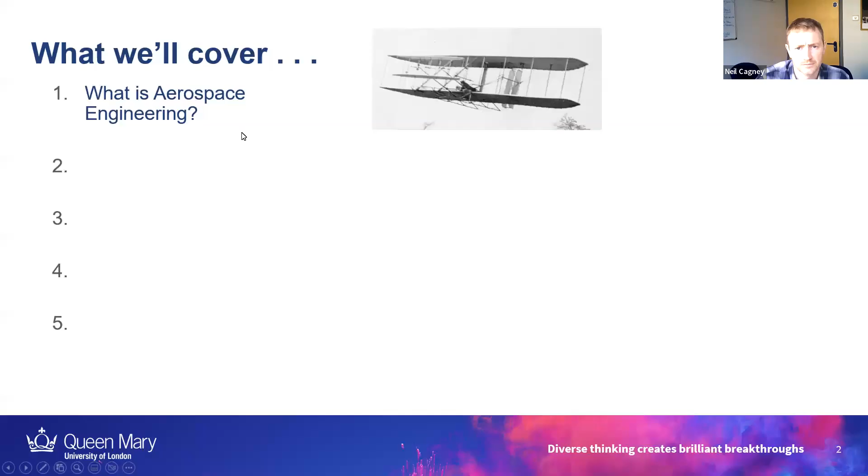So that's just what is summarized there. So what is aerospace engineering? We're going to talk a little bit about aerospace at Queen Mary, as well as what you'll study. I'll give a brief introduction to the student projects, and then also we'll talk about the careers and opportunities. So firstly, what is aerospace?

Aerospace. So there's also space systems. That could be rockets, the type of things that SpaceX is producing, or it could be satellite systems that often involve a lot of robotics and energy systems. So it could be those.

And then also, more broadly, when you think of something being aerodynamical, you think of how it relates to the air flowing past it, and that would be relevant often in the automotive industry. A lot of students are very interested in Formula One, but there's also a lot of stuff like family cars, and there's a huge range of jobs in the UK in both those sectors.

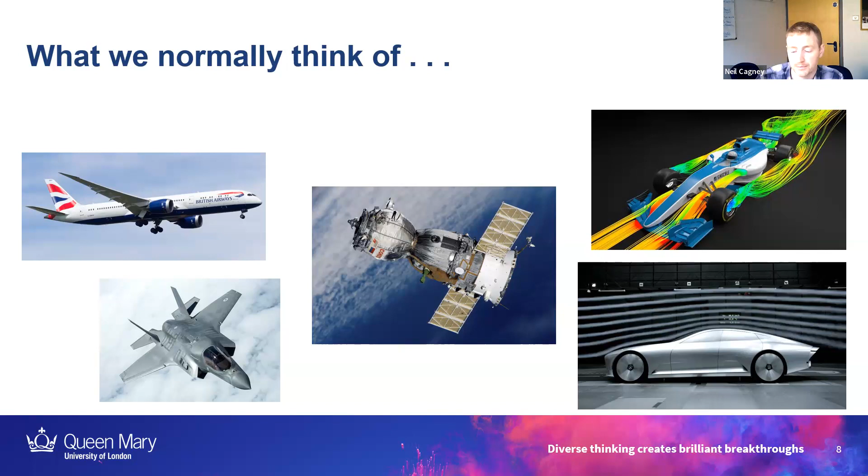The design principles are exactly the same. If you've got any type of power system, it generally involves either burning a fuel or turning water into steam, passing that steam through a turbine, and taking that rotational energy. So it's essentially like a wind turbine. Different design constraints, but the overriding principle is it's just aerospace, it's aviation, it's that flow past wings, past turbine blades that makes them rotate. So aerospace is central to energy systems.

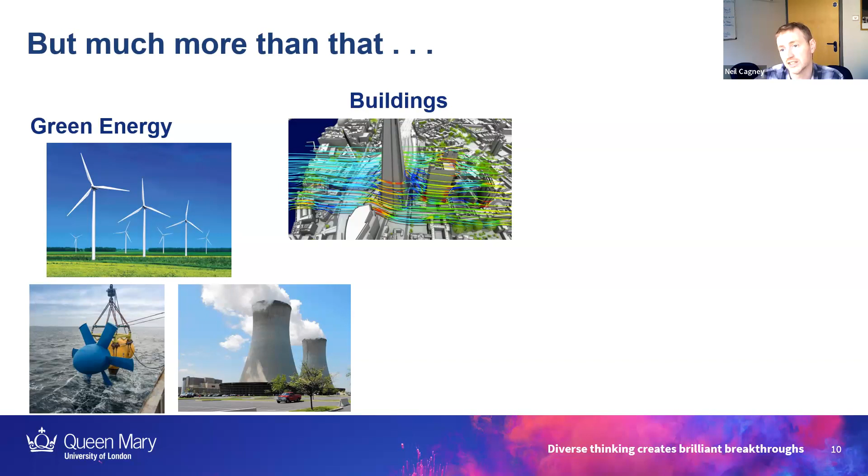One of the elements that's been quite relevant in recent years is disease spread. These slides were made during the pandemic, and one of the things a lot of us within the aerospace department were working on was COVID spread. The way it spreads is through tiny droplets or large droplets. Tiny droplets drift with the air, large droplets move ballistically, essentially like a missile, just fires out.

One example was from the 2010 World Cup in South Africa. They introduced a new football, and when they played the actual tournament, they found it swerved kind of chaotically. What had happened was they thought, by sealing it better, removing all the stitches and making it extra smooth, they'd get better play. In fact, what they found was it caused it to swerve, and they hadn't really understood the aerodynamics of it.

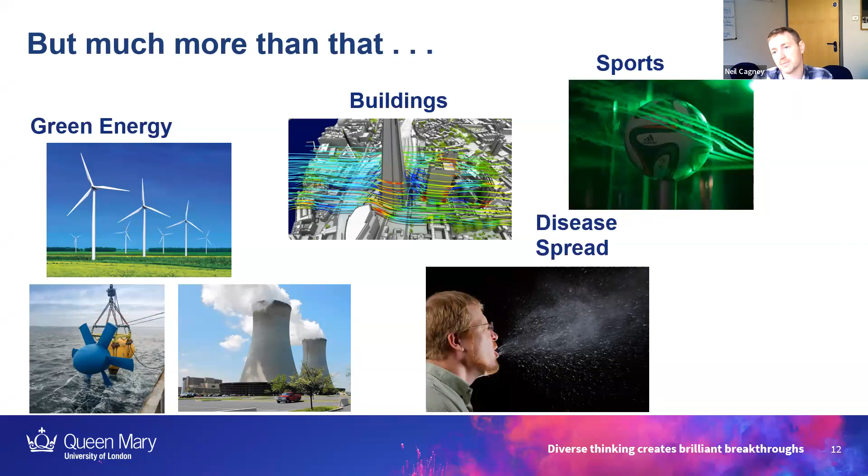So the point of these slides was just to give a scope of aerospace. You're not just locked into some of the classic things we think of with aerospace - not just aviation or space or automotive design. There's a huge range of different potential sectors you can move into with an aerospace degree.

Now, if you do go into the more classic sense of aerospace, what are some of the things you could be working on? There's essentially three different sectors. One is experiments - for example, you're working with Boeing, designing the latest generation of plane. It's constructing things, physically testing things in wind tunnels.

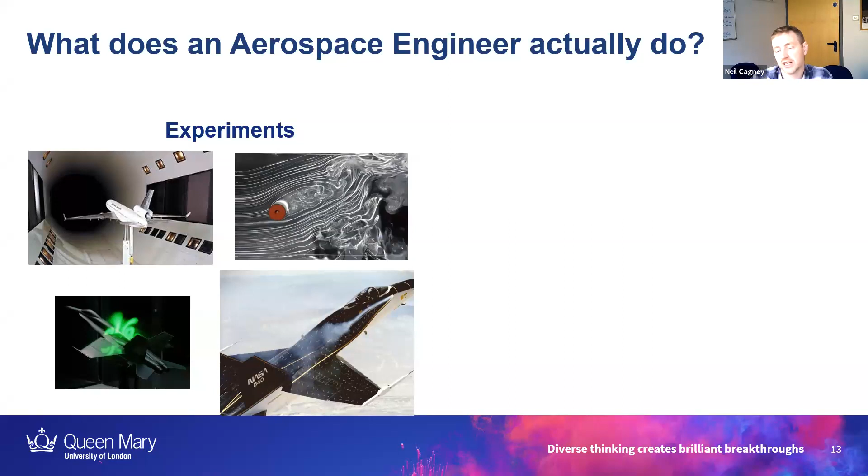There's different ways you can do that - it could be taking test flights, which is the image shown at the bottom right, or it could just be doing wind tunnel measurements. And it's reading this data and trying to process it and test out the designs.

One of the massively growing sectors is computer simulations. Now if you've got, say for example, a new wind turbine design, 100 meters high, 50-meter diameter, it's not practical that you would be making test models each time, installing it at a cost of millions, and then testing it, and then scrapping the design and starting again.

Just some other examples here - there's fighter jets, the Formula One car, but it's used in all sectors. How this would work in practice, something not shown here, is you generally work with design engineers. So essentially the whole process of how design takes place: design engineers will come up with something, a new design, that gets tested with the computer simulations.

And the computer simulations are great, but we can't really trust them until we've got experiments to go with them. So the experimentalists and the computer simulation people work together to test out the new designs. They might give guidance, link back with the design engineers, and the design engineers will generate the next generation of designs. That's the whole basic principle of what the majority of jobs are within aerospace.

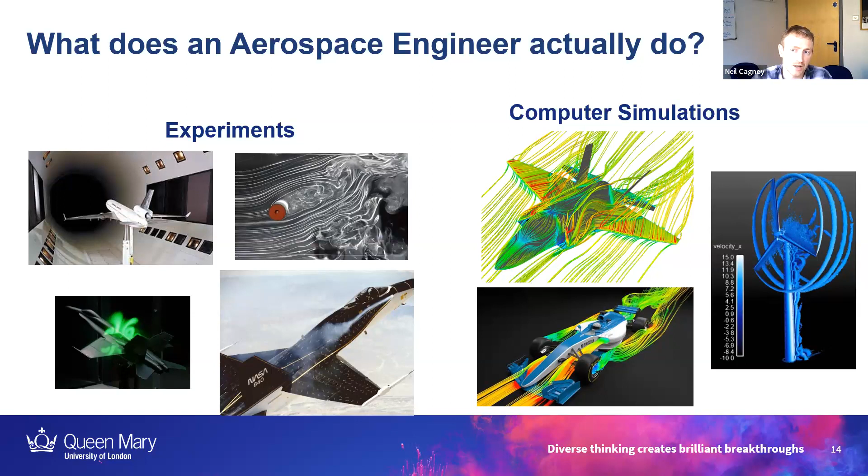Computer simulations is probably the largest sector, followed by design, and the experimentalists a relatively smaller amount.

Now I'll just talk a little bit about aerospace within Queen Mary - a little bit about the aerospace division here. The aerospace department was set up in 1907, 1908. That means it's the oldest aerospace department in the UK, and arguably the oldest in the world. For context, the Wright brothers' flight was just a few years before, I think in 1903. So we're really right at the cusp of when it started.

We're fully accredited by the Royal Aeronautical Society and the Institution of Mechanical Engineers. Now what that means is these are UK-wide bodies of mechanical or aerospace engineers, and they've come in, gone through our entire teaching program, and given it the stamp of approval that this is a high quality degree that will be respected anywhere in the world.

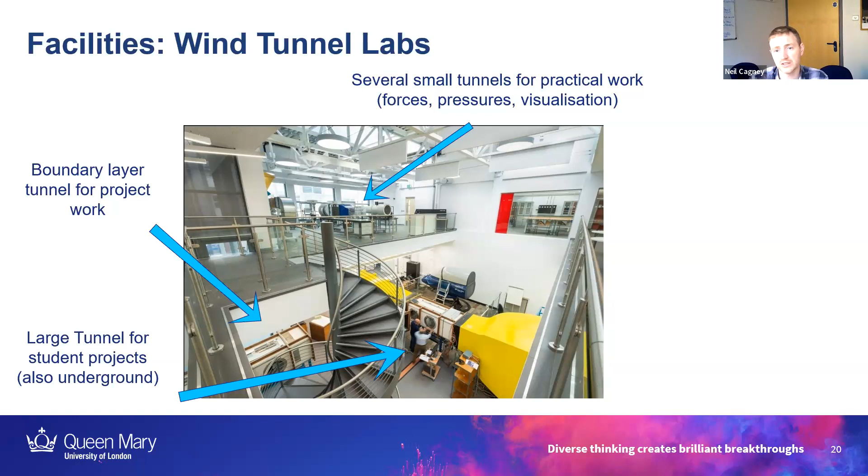There's several smaller wind tunnels on the top here. These are things for measuring the forces and stuff you can place in the wind tunnel, measuring pressures, doing smoke visualization. If you come to some of the open days, you might get a demonstration of these. They're used extensively throughout the second semester of first year, and then also in second and third year as well.

There is a flight simulator. This is soon going to be out of date - we've commissioned and bought a new one, which will be installed in the coming months. It's larger and has greater adaptability. I'll talk about that again in a couple of minutes.

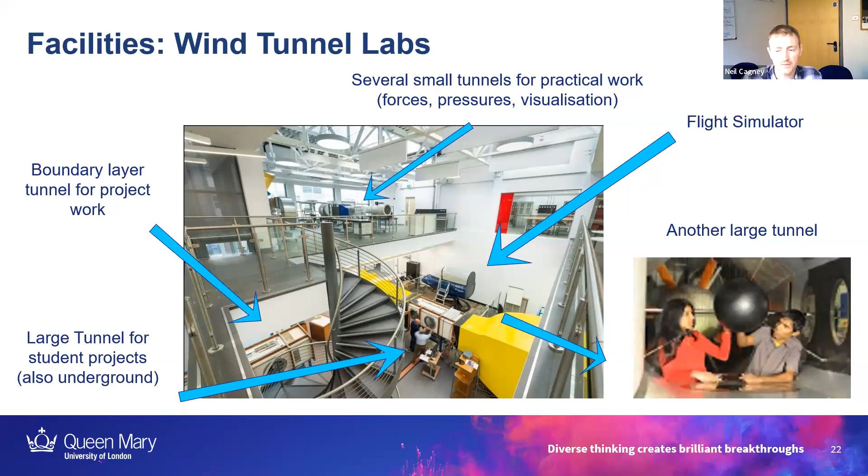And there's another even larger wind tunnel that can go up to about 100 miles an hour. That's out of shot there.

We also have the series of supersonic tunnels - supersonic meaning going faster than the speed of sound. We have 3 of the main tunnels, with 2 shown on top. One of them, shown top left, can go up to Mach 3, 3 times the speed of sound, so the air is going at about 1 kilometer a second.

We've also got a transonic one on the top right, looking at wind speeds just below supersonic, which is where a lot of civilian aircraft operate. We can measure the forces and pressure distributions within the wind tunnels. If you've got the nose of the plane, shown bottom left, you can look at the shock waves created by the supersonic flow and also the effect of that flow on the structure.

We're also interested in supersonic acoustics - we've got some facilities for that. If any of you have ever experienced a supersonic boom, you'll know it's very loud. For example, with the Concorde, the civilian jet that flew back and forth from the UK to the US, one of the reasons it went out of business was that it was no longer economical, partly because they couldn't fly at supersonic speeds over land since the noise was too high.

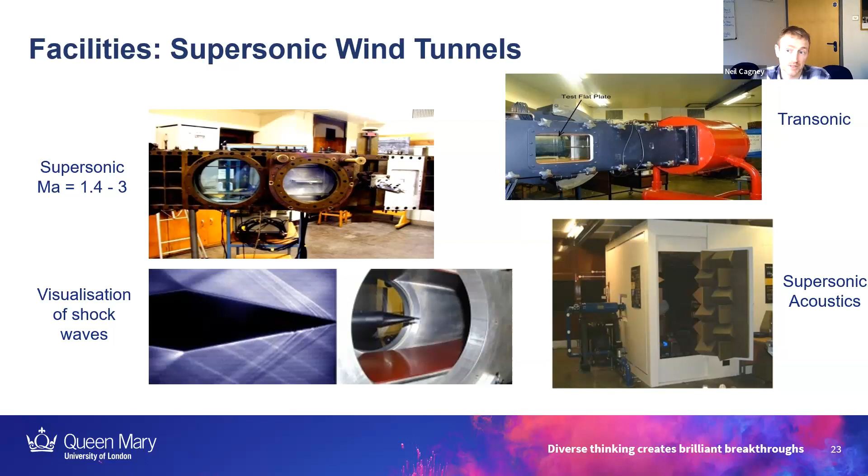So some of this research is about - we've got this anechoic chamber and it's blasting air out of a nozzle at supersonic speed, replicating what you'd get in the jet engine of something like a Concorde or a fighter jet, trying to understand how we can minimize that noise.

Now, this is a bit more in-depth look at the flight simulator. Again, this is up to date but will soon be out of date once we get the new system in. This is it operating, with a student inside. That's what the student can see - it's a replica of a full cockpit. As they're turning, you can see the hydraulic system mounting the flight simulator is also turning to reflect that.

The new system will have a greater range - essentially it's open source, so we can upload properties for any different type of jet or plane, civilian or defense. It has greater hydraulics, so it can really replicate the movement more, and it's larger, so we can get multiple students in at a given time. This is used in some of the flight and stability modules in second and third year, and also in research projects.

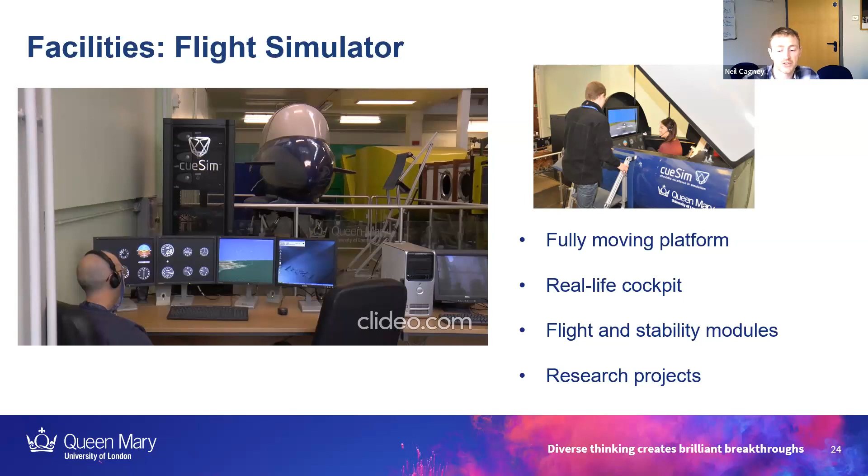Students also get, in their second year, during one of the flight and stability modules, which I'll talk about later, taken up for an extreme flight course at Cranfield. Now what this involves is...

Throughout the module, you learn about different flight conditions, basically how you can end up in dangerous conditions where, for example, the plane starts to wobble or pitch, and the pilot actions needed to maintain safe flight.

You also learn what type of control system you would need to maintain that safe flight throughout. Now, this extreme flight course would normally be taken by pilots, so they're getting themselves into these unstable or dangerous flight conditions and then stabilizing themselves.

We also have a series of supercomputers. Now what this is replicating here is something called bird strike.

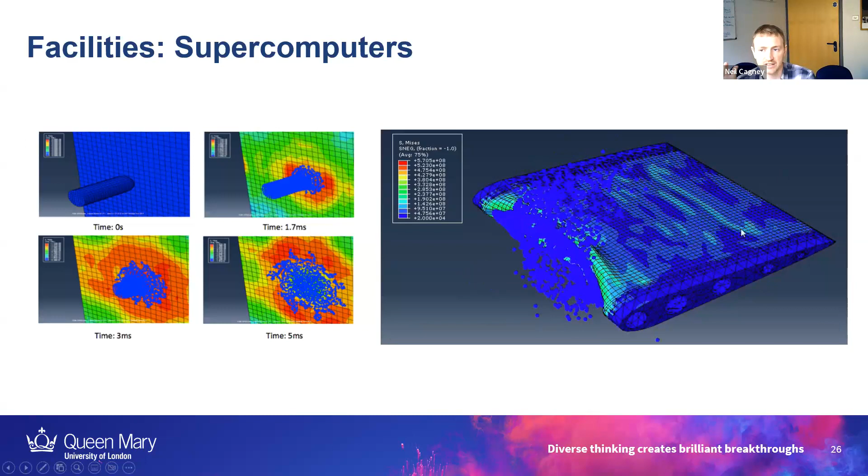It's birds essentially splattering. You can see the wing crumpling a little. Next we're going to get a look inside to see how the internal structure has withstood.

You can see it's got these girders inside, and you can see that the front one has bowed, but it hasn't broken.

That gives a reflection of some of the work that a design engineer might do, that mixture of understanding the mechanics of solids, how materials are used, understanding the choice of different material properties you need, understanding how you cleverly use things through design, and using computer simulations and that computational side to really probe that.

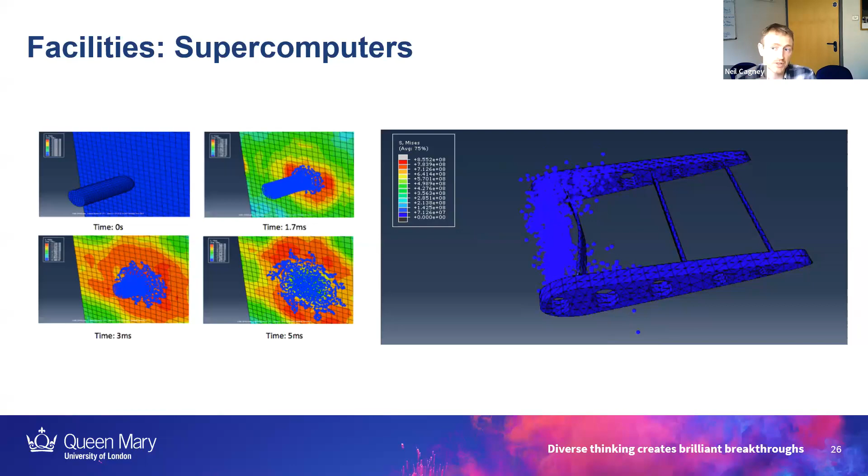So what you study, if you... sorry, excuse that.

Each year is divided into 2 semesters, so essentially before Christmas and after Christmas. Within each semester, you take 4 modules. Now, in many of these, you share them with the other streams, the mechanicals or the chemical engineers or whatever. And then the ones highlighted in yellow are the ones that have a specific aerospace component. I'll talk about each of these.

The first thing I want to talk about is computational maths and modeling. It's split into 2, statics and dynamics. What these essentially are is kind of a maths module. You need to have, in any engineering degree, one of the reasons why engineers are in such high demand in the job market is because they've got a solid foundation of maths. So you will use maths throughout all modules, but you really get a foundation for that in your first year in these two modules. We've kind of combined that with a bit of physics and mechanics. So the first one is using maths but applying it to static problems, so that's structures that aren't moving. And then dynamics is the second one, where things are moving more. That's probably more relevant to aerospace, where, in this case, the air is moving.

Both of these, the computational part, also involves computer coding. The way undergrad programs were traditionally structured was that you would learn little different bits of code in different modules, depending on the preferences of each individual lecturer. We decided to scrap that, so you consistently build up, and so the second year modules build on the bits of coding you learned in the first year. In this case, we've chosen to opt for Python because it's used a lot in industry, it's used a lot by engineering employers, and it's readily available for you to work on, both within this course and if you want to continue developing that outside. So the maths is combined with this computer programming.

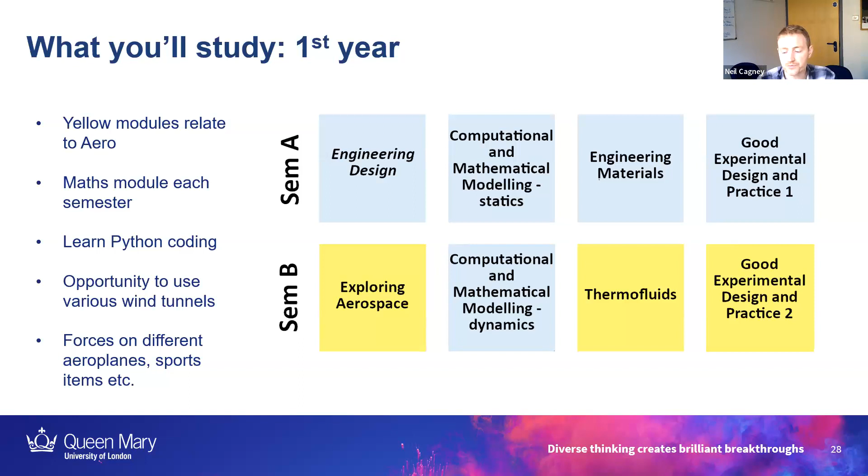So for example, when you saw that video earlier of the internal kind of beams within the wing kind of bowing under the impact of the bird, it's understanding at what point materials break. So, for example, if you've got the titanium on the outer surface of a wing, how much impact can that take before it starts to tear? If it kind of pings in and deflects and bounces back to its original position, fine, we don't care. But at what point does it start to tear and rip? In which case you would have a very kind of dangerous situation.

There's instrumentation and measurements. So that's the kind of science behind the fundamentals of how you monitor things, either in experiments or a kind of general monitoring system within a plane or any kind of engineering system. Spacecraft dynamics, now that's our first introduction to the kind of space side of aerospace. And that's looking at the kind of mechanics of space systems, both kind of maintaining stability of rockets during takeoff, but also the manipulation of how you kind of orientate yourself in space, say if you're adjusting things on a satellite.

Now there's aerothermodynamics, which is a very long name, but essentially means supersonic flight. Now what that comes in is the physics of how a plane operates at subsonic speeds, so lower than about 330 meters per second, is quite different to how they operate at supersonic speeds. You need to have a lot of different design constraints because you worry about the shock wave, you're worried about the great heat you can generate during supersonic flight. So we do cover supersonic flight.

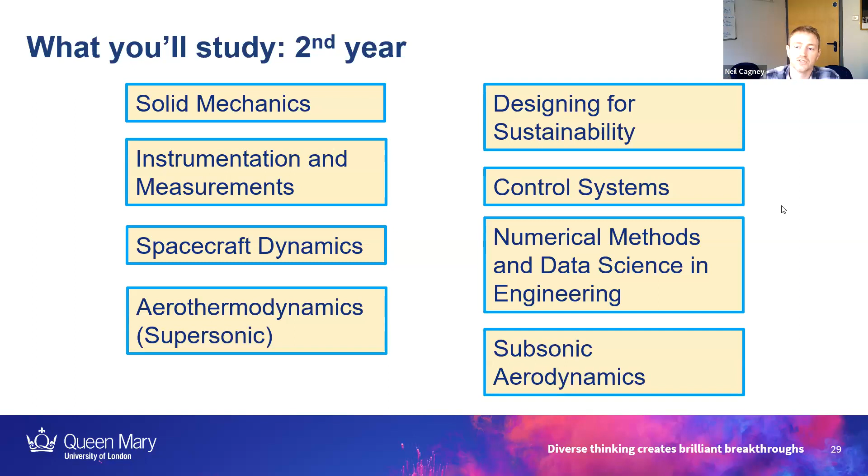Lastly, you've got designing for sustainability. This is furthering design, which we've discussed before in terms of how many jobs within aerospace are design-related, and it's linking that with sustainable engineering. How do we make sure it's both environmentally sustainable, using good materials, understanding whether it's sometimes better to use ones that slightly damage the environment but are less likely to lead to failure? How do you weigh up the environmental impact over the lifetime? For example, if something's slightly damaging to build but leads to lower emissions, understanding those sorts of choices that affect engineering design.

Now, your third year is a little different. You've got a bit more choice in what you choose. In this case, you take 3 modules per semester, and then one individual project that runs across both semesters. I'll talk about the modules first, and then come back to the project.

First we have aircraft design, which makes the design element more applied, looking specifically at aerospace problems. Next is engineering simulations, where you start to learn the ability to develop computer simulations, like we saw with the bird strike or the faster wind turbine. Again, it's a huge skill for aerospace in the modern market, and this is where you start to learn that.

We also get flight dynamics and stability, which is a follow-on from the control systems module you'd have taken in second year. This is specifically honed in on maintaining stable flight. Now you've also got some choice.

You can do a more advanced module on supersonic flow. A lot of students who are quite interested in defense applications might take that, because they're interested in the supersonic applications.

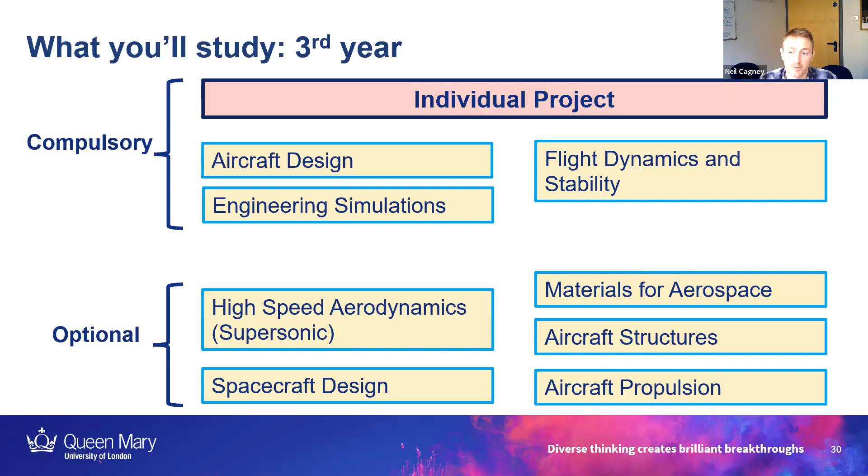Now, a little bit about student projects. In your 3rd year you take an individual project, and in your 4th year there's a group project, if you're doing the master's in engineering. We always try to match the project to students' interests - there'll be a list up online and you can apply for which ones you want. For example, if students are interested in defense applications, they might want to look at a supersonic project. Other students have become fascinated with design elements, sustainable energy, or whatever.

Projects can be either experimental or computational - either doing experiments with wind tunnels, or computer simulations. For aerospace materials, it might be developing materials within the materials labs and testing them for strength or durability. Or if it's design projects - design is probably the most popular among students. Just a couple of examples here: this is a student whose project was looking at the effect of car shape on drag or air resistance.

So again, you would have come up with this computer model, had it 3D printed, and installed it within the wind tunnel. There's currently a group of students doing a project looking at the aerodynamics of trucks and different methods to reduce air resistance and save fuel.

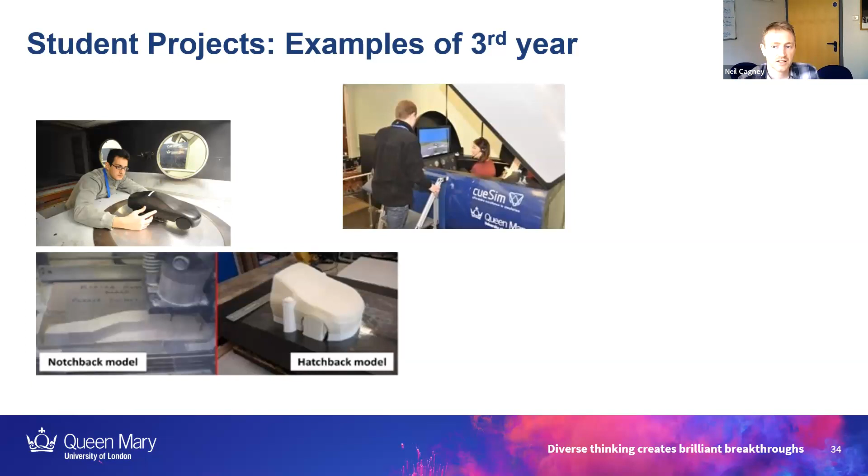Some students are quite interested in the flight simulator, so you get an opportunity to use that in 2nd year, and then they decide to continue on with that in their 3rd year project. Some students this year in their 3rd year are going to be developing and designing their own flight simulator. And then there's a series of projects on supersonic flow, either computer simulations or experimental work using the supersonic systems.

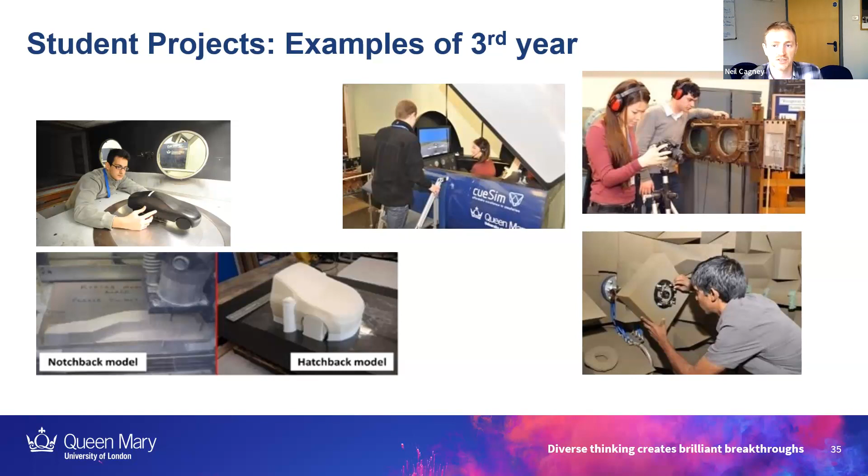A lot of our students are quite interested in Formula One, so there's a Formula One student society, and a lot of students in that society choose to do a project related to Formula One. This is a large model of a Formula One car, about 60 centimeters long, placed in the subsonic wind tunnel.

What this student project was interested in was understanding how the airflow flows over this design of the Formula One car. What they've done is painted it with luminous paint. Before it's dried, they place it in the wind tunnel at high speed, so the air moves over and the paint streaks along. You can see some streaking at the side or at the bottom plate.

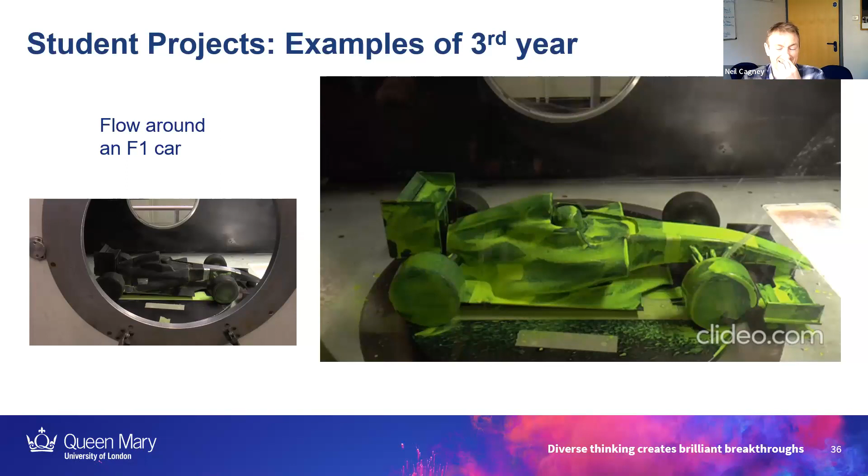You then take it out and allow it to cool and dry. What you find is you look over and find where you start to get pools of paint, which means the airflow has come in and stagnated. You might then feed that back to your design engineers, another student you're collaborating with, as an indication that if we're getting stagnant air there, that means high pressure, and that high pressure is pushing us back. That's an inefficiency within the design you might try to improve upon.

For the master's projects, these are always done in a group, and they generally involve a combination of computer simulation, design, workshop building, experiments, and field testing.

Just a couple of examples. This is the project done with the UK National Bobsleigh team. They've got this combination of wind tunnel testing that was done at BAE Systems at Warton, and this is the actual bobsleigh that would be used in the Olympics. This is some visualization they did with one of the bobsleigh drivers, spraying smoke in over it, then looking from that video to work out how that smoke moves over and how the design could be optimized.